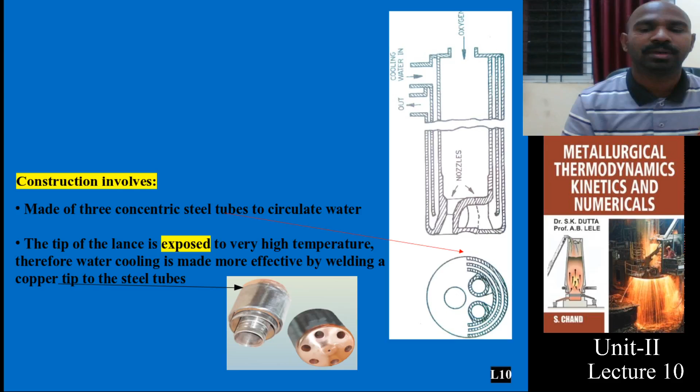Today I am going to speak about the construction of oxygen lances. The main thing involved is that this particular oxygen lance is made up of three concentric steel tubes with continuous circulation of water.

One more thing to notice is that the tip of this steel tube is made up of copper, which is surrounded by steel, constructed by welding.

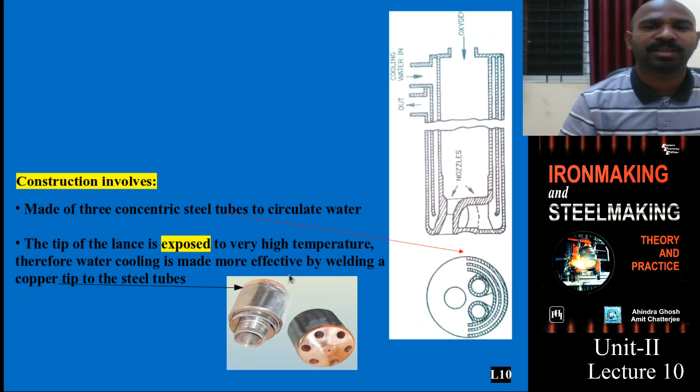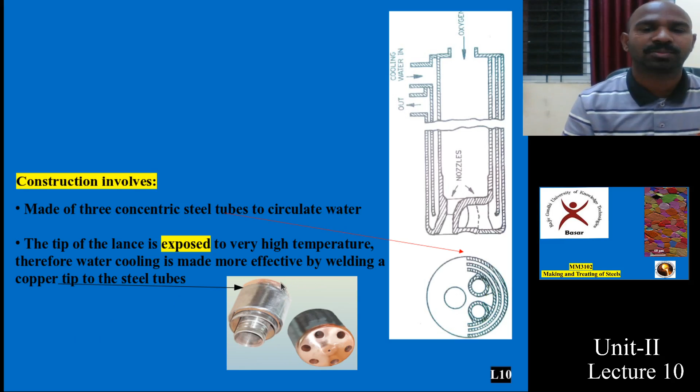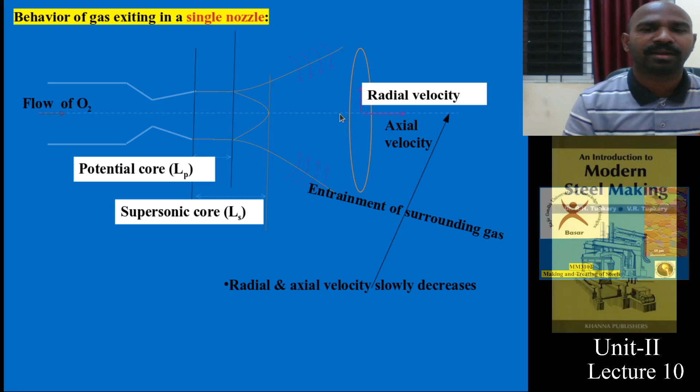One needs to notice that if this particular nozzle is a single nozzle, assume the flow of oxygen is coming from this direction, this is a typical nozzle design. This is the axis of oxygen coming from the top of the LD converter, so I can call the surrounding component the radial velocity, whereas along the axis it is called the axial velocity.

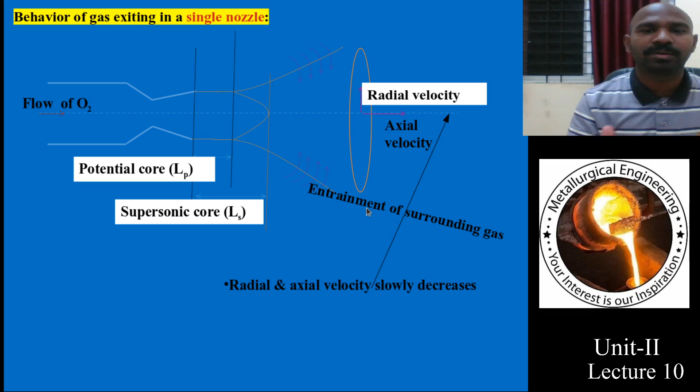This particular oxygen gas may entrain or interact with surrounding gas. To repeat, this incoming oxygen flow, along the axis, is called the axial velocity.

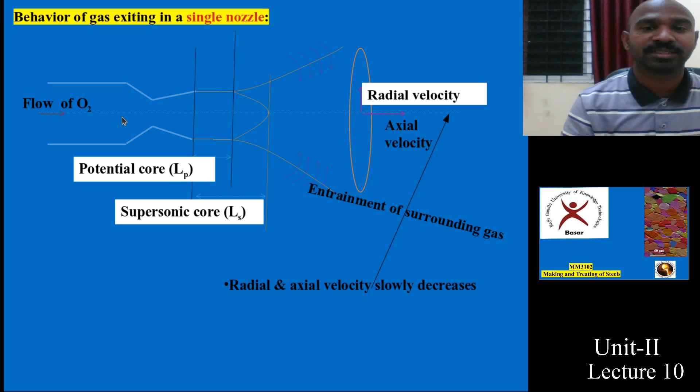There is one more assumption. If you consider realistic situations, it also interacts with the surrounding molten steel, and there are a few terminologies used in this oxygen lance and molten metal interaction.

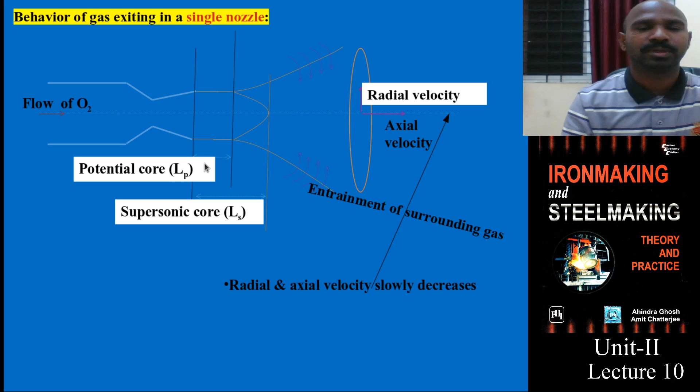From this tip to the surface of the molten steel, it is divided into parts. The first part is called the potential core, and from there to the next stage is called the supersonic core, with supersonic velocity and potential velocity.

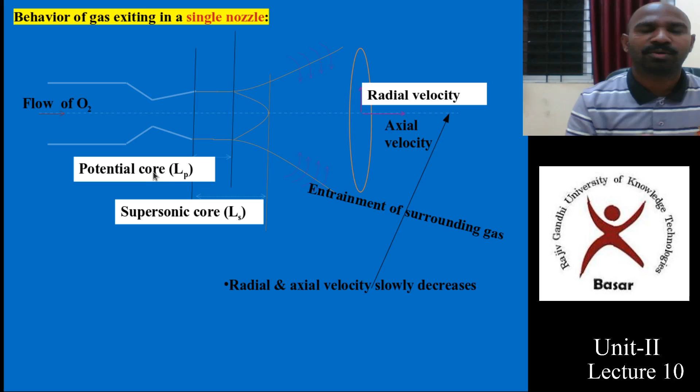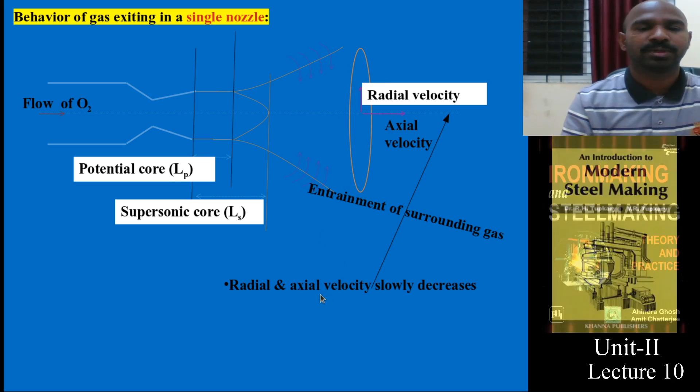Based on that, these distances are categorized into radial and axial velocities, and there is a dependency: radial velocity keeps decreasing, and axial velocity also decreases as the distance proceeds.

Coming to the spread of this oxygen jet, how do we understand what the spread will be inside the molten metal, even while maintaining distance from the surface of the molten steel? There are simple formulas to analyze this and get an idea.

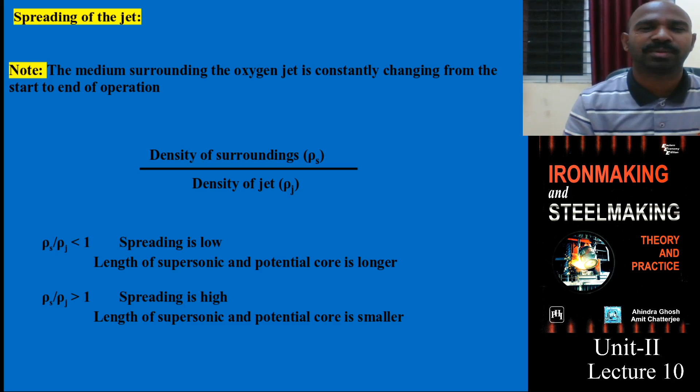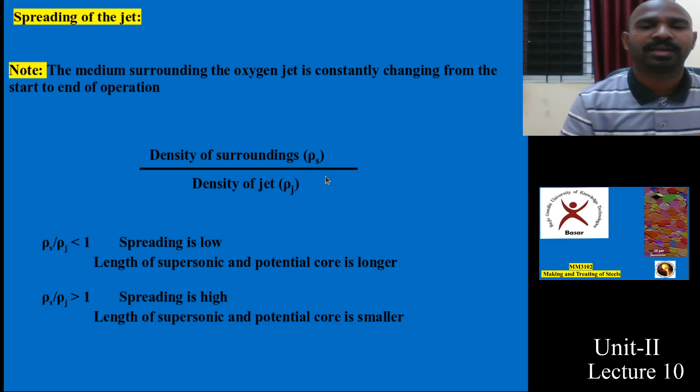The medium surrounding the oxygen jet, in this case molten steel, constantly changes from the starting point to the ending point as time proceeds because of the surrounding interaction. So it is decided that the spread of the jet can be estimated by the density of the surroundings, the molten steel, and the density of the jet, the gas jet.

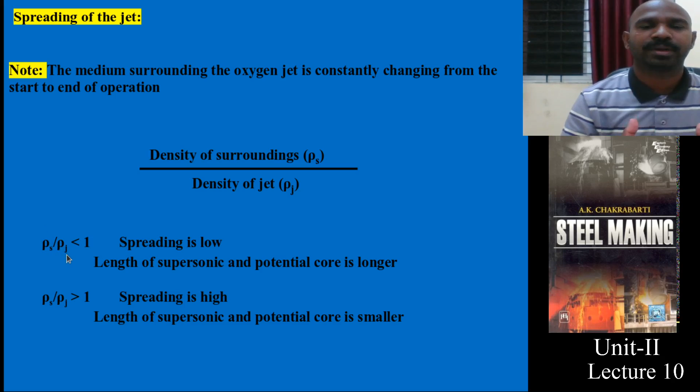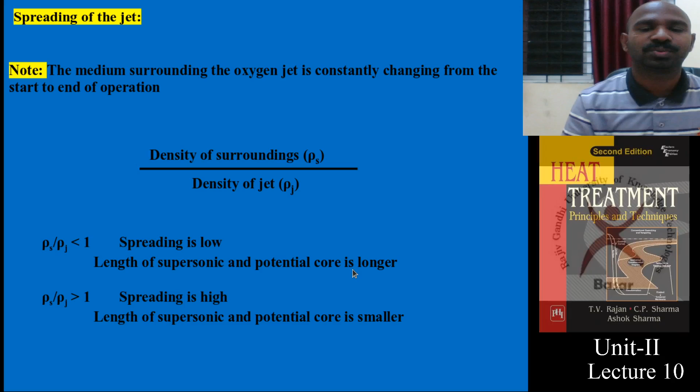If the ratio of surrounding density, molten steel density, to jet density is less than 1, it is assessed that the spread is low, meaning the length of the supersonic and potential core is longer. If it is greater than 1, spreading is high, and the length of the supersonic and potential core will be smaller, compressed.

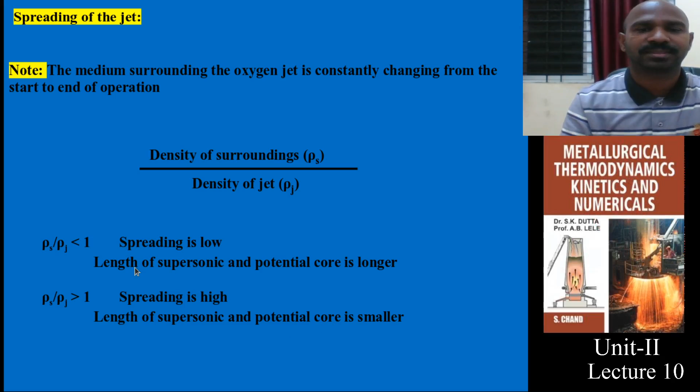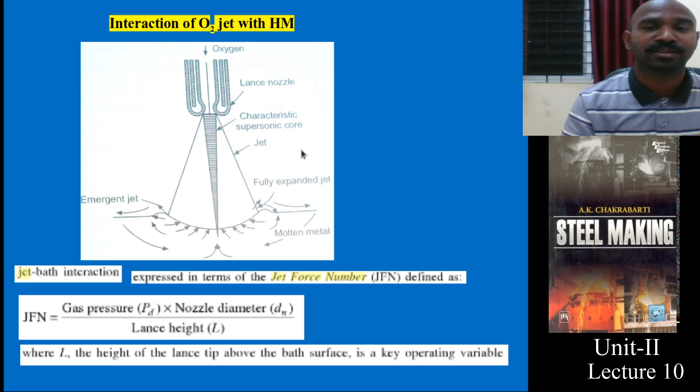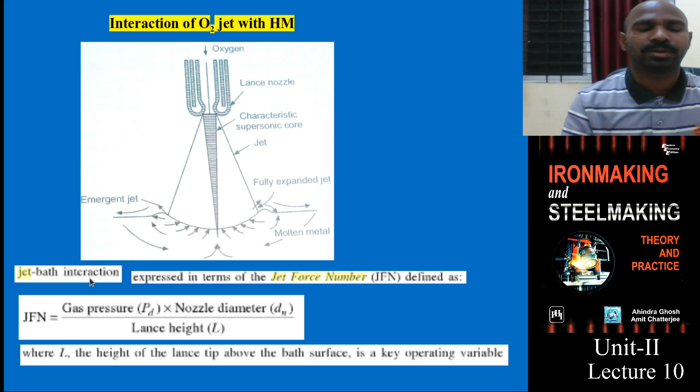Here I am going to tell you about the interaction of the oxygen jet with hot metal. How does it interact? How do you assess and calculate the incoming oxygen from the oxygen lance tip to the surface of the molten steel? It can be characterized by a parameter called jet bath interaction.

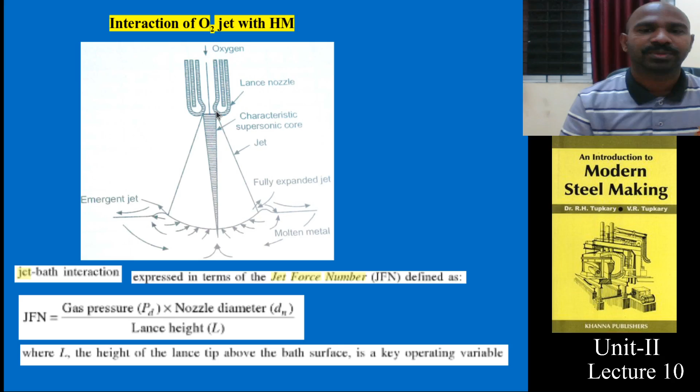This is expressed in terms of the jet force number, which is a ratio of gas pressure and nozzle diameter, the oxygen lance diameter, and the lance height from the molten steel to the oxygen lance tip. Remember these formulas, there will be numerical problems in the final exams and the gate examinations.

The jet velocity can also be calculated by another parameter such as Mach number: the ratio of velocity of the incoming oxygen gas to the velocity of sound it creates inside the molten steel.

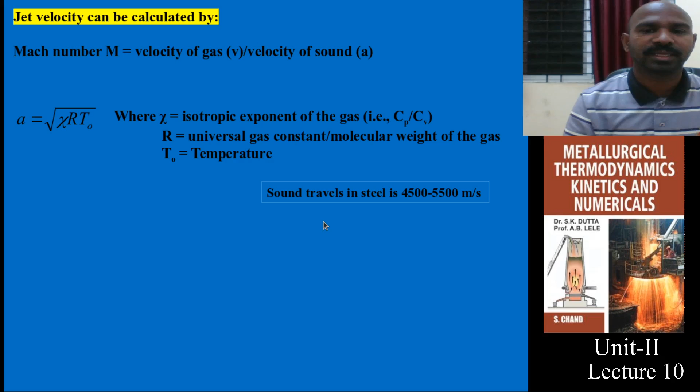So how do you calculate the velocity of sound? For example, the sound velocity in steel is a standard value around 4500 to 5500 meters per second. But within the molten steel, in this particular situation, how do you calculate it? It depends upon chi, the universal gas constant, and the temperature at that particular location.

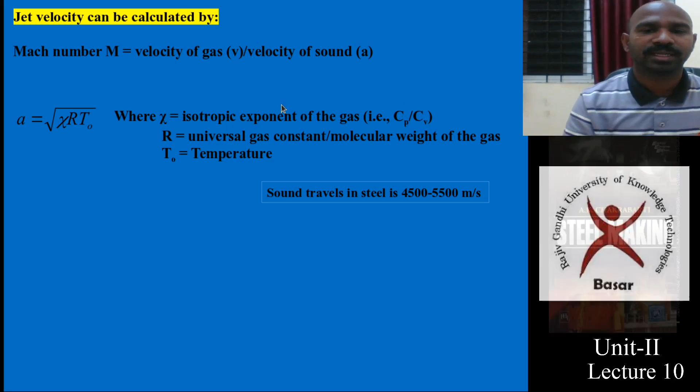Chi is calculated as the ratio of constant pressure and constant volume, which is the isotropic exponent with respect to those gases, and the universal gas constant is a standard value, with temperature taken in Kelvin. You can calculate it this way, but there is another dependency.

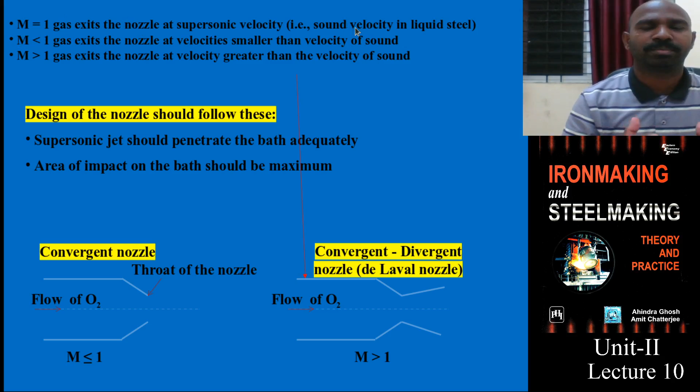You can characterize this Mach number. If it is equal to 1, you can say it is equal to the sound velocity of the liquid steel.

If it is less than 1, as oxygen exits the nozzle and interacts with the molten bath, the velocity of the nozzle is smaller than the standard velocity of sound in the steel.

If the Mach number is greater than 1, the velocity of the oxygen jet is greater than the velocity of sound, and the design of the nozzles depends upon this parameter.

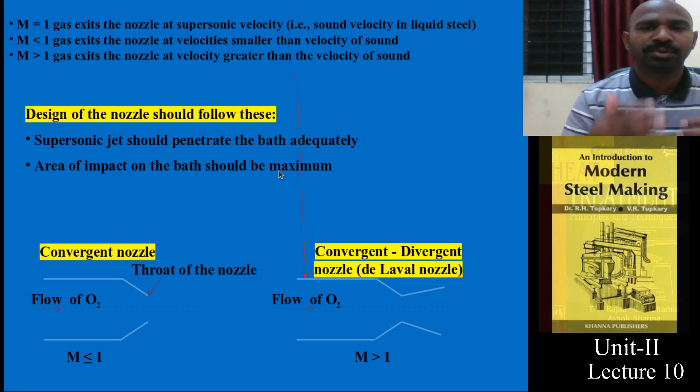The supersonic jet should penetrate the bath optimally. It should not be very high speed, and it should not hit the wall of the molten metal converter. The area of impact should be maximum in both radial and axial directions, so that you get optimum stirring and homogenization of the steel quality.

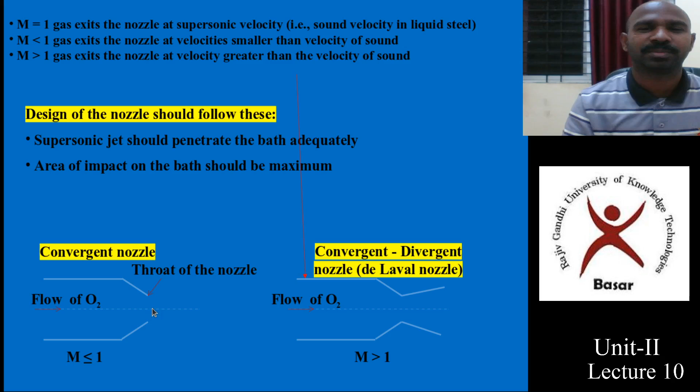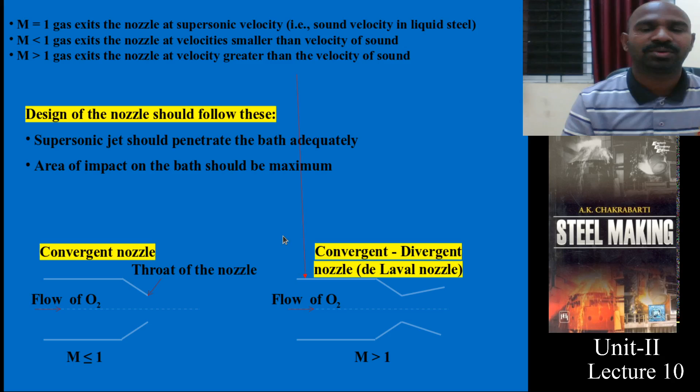There are two types of nozzles in practice in industries: the convergent nozzle, and the convergent-divergent nozzle. In the convergent nozzle case, the Mach number is approximately less than or equal to 1, while in convergent-divergent it is greater than 1. So depending on the requirement, if the steel quality is more heterogeneous before refining and converting iron into steel, you use convergent-divergent type nozzles.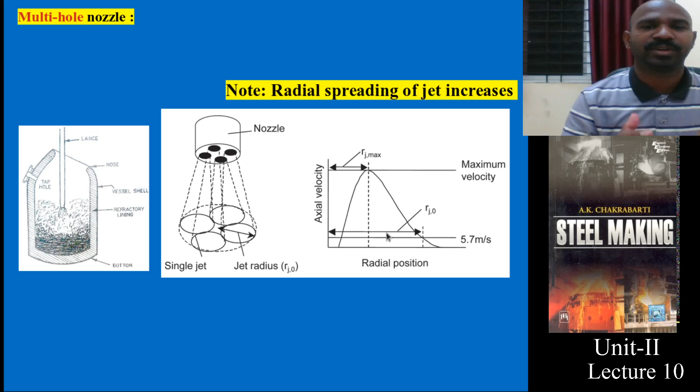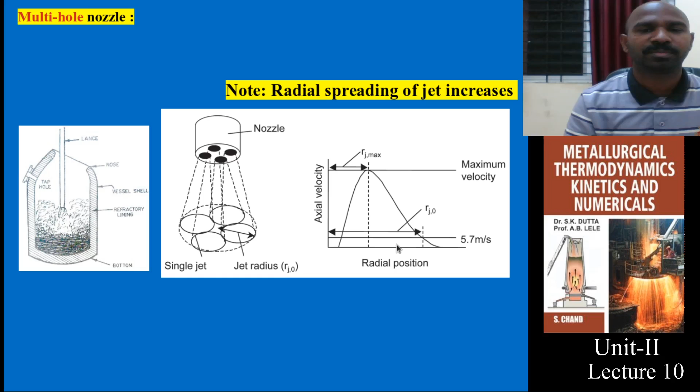With multiple nozzles instead of a single nozzle, how do you characterize the spreading of the oxygen jet inside the molten steel? The axial velocity is maximum at one particular jet radius along the axial direction. Along the radial direction, for example at 5.7 meters per second, the radial position increases and becomes longer, and after the maximum velocity is achieved, it slowly decreases.

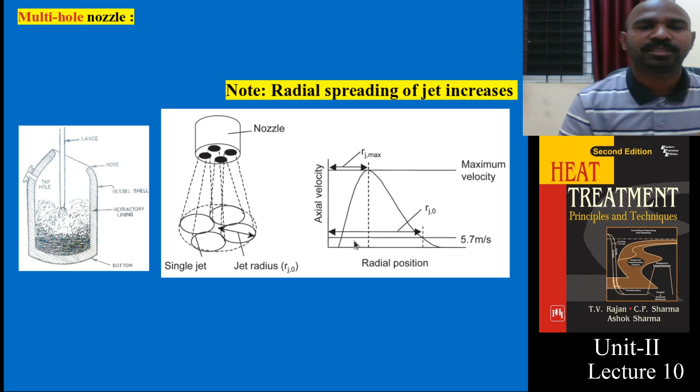This is the practical view of the oxygen lance and LD converter shown as reference on the left side. The area of impact of the oxygen jet on the molten steel bath can be increased by changing from a single nozzle to multiple nozzles.

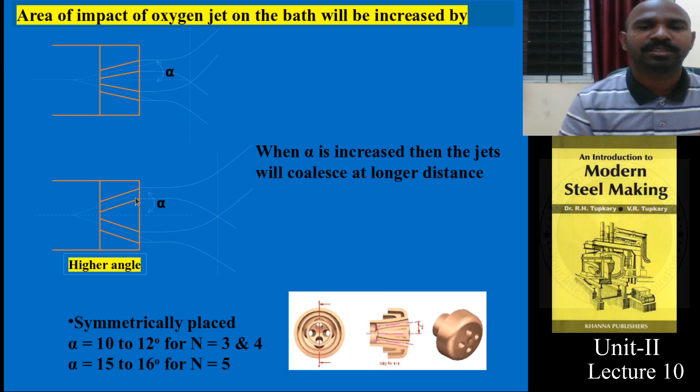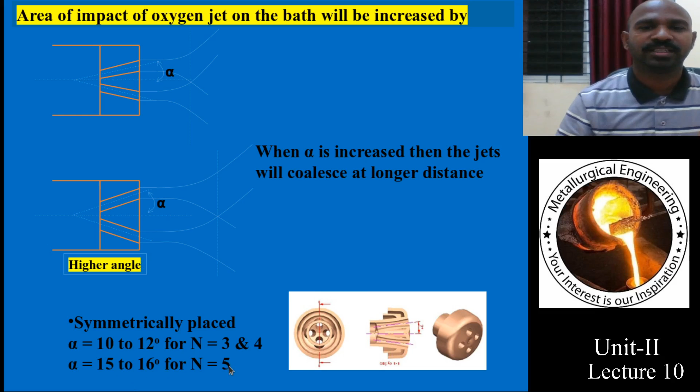This occurs based on the angle from the axis to the nozzle axis line and the nozzle velocity. For example, if the angle is lower, the jet coalescence, or interaction of the jet with the molten metal surface, occurs at a certain distance. If the angle is increased higher, such as 15 to 16 degrees with 5 nozzles, it coalesces at a larger distance. These schematics illustrate this.

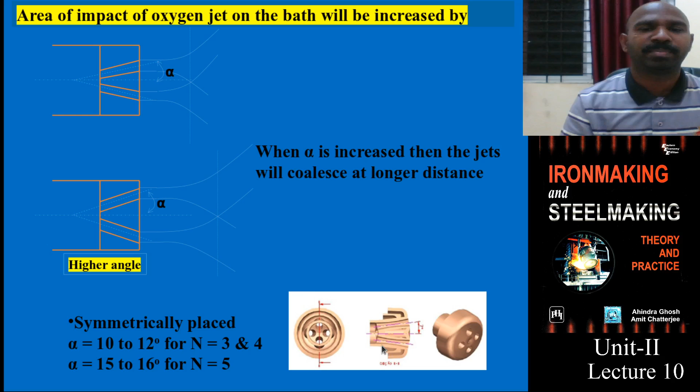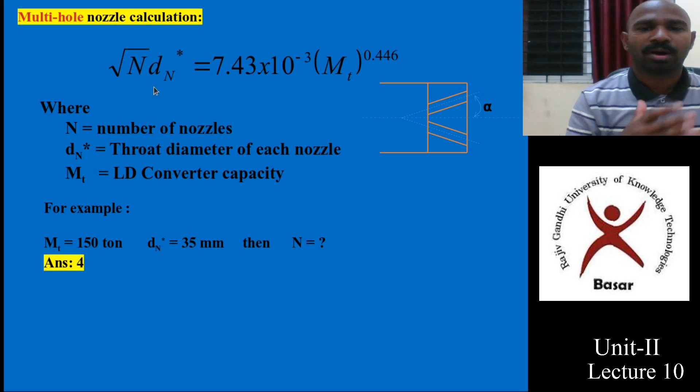Now these are practical schematics of multiple oxygen lance jets, in the case of multiple hole nozzles. So how do you calculate the number of nozzles? If I give you the LD converter steel capacity and the diameter of a single nozzle, how do you calculate the number of nozzles? Using this simple formula with molten metal capacity in tons and nozzle diameter.

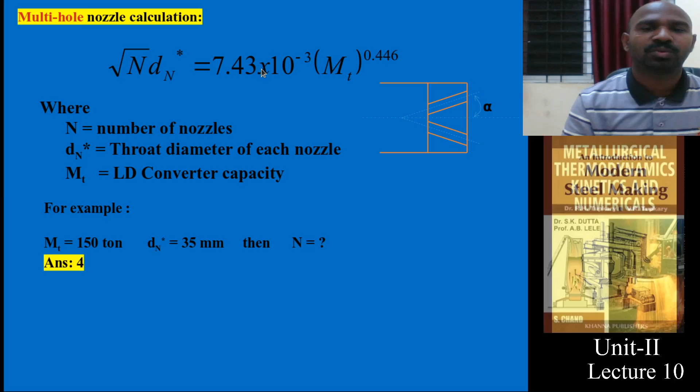So the only unknown parameter is n. This is multiplied by 7.43 into 10 to the power of minus 3, and you can calculate it. For example, in this situation, if you substitute all these values, n comes out to 4. This suggests there are 4 nozzles.

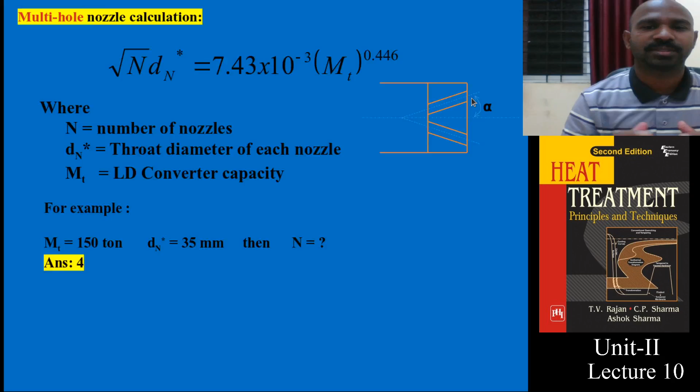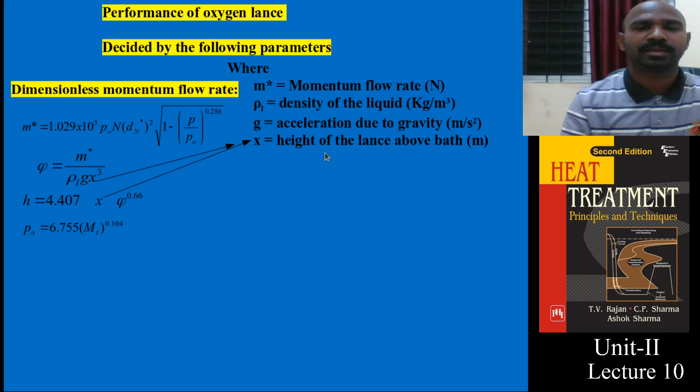How do you calculate the performance of the oxygen lance? It can be decided by the following parameters. Try to understand: M star is the momentum flow rate of the oxygen jet in the bath, rho L is the density of liquid steel, g is acceleration due to gravity, and X is the height of the lance above the molten metal bath surface. N is the number of nozzles, Dn star is the diameter of the nozzle, and P naught is the applied pressure in bar. All units are mentioned here, P is atmospheric pressure, and P naught is the applied pressure.

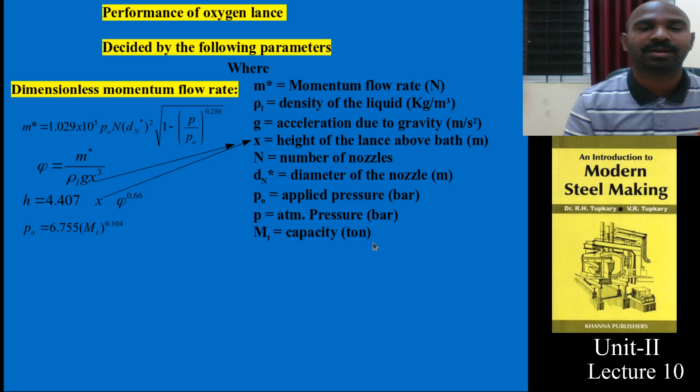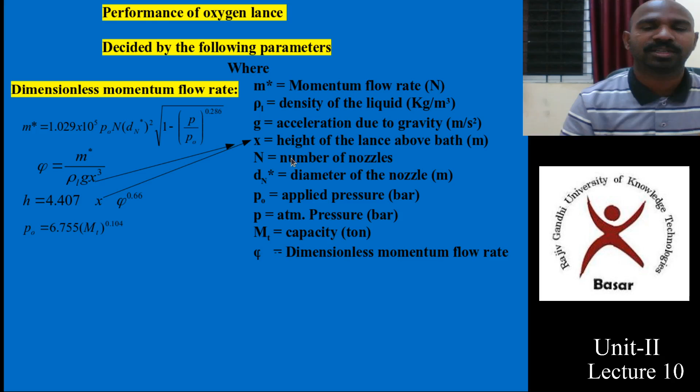MT is the capacity of molten steel in tons that can be produced. Phi is the dimensionless momentum flow rate, calculated from M star, rho L, acceleration due to gravity g, and X, the height of the lance above the bath. This gives you the dimensionless value.

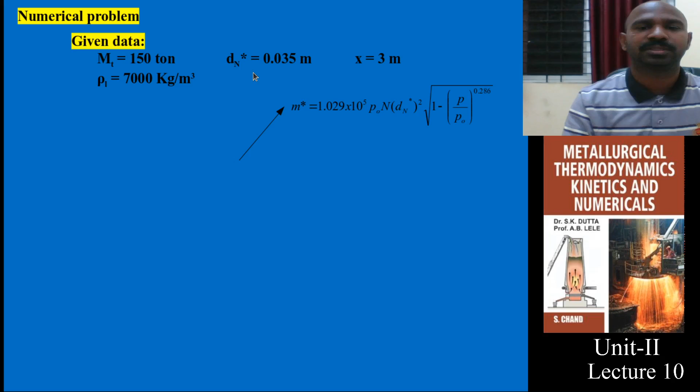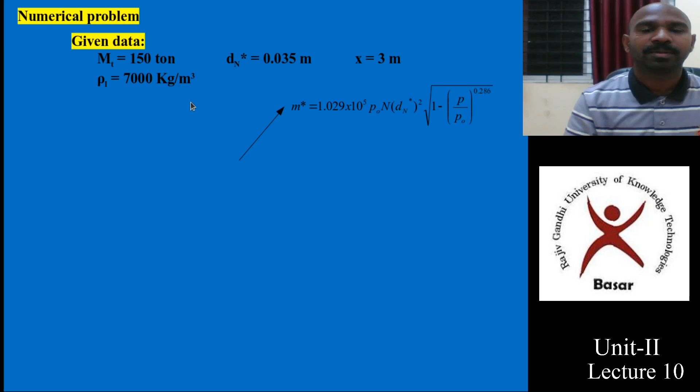Let's take an example with these formulas. If I give you the molten metal capacity produced by the LD converter, the nozzle diameter used for this process is 0.035 meter, the lance height above the molten metal surface is 3 meters, and the density of molten steel is 7000 kg per meter cube, calculate the following parameters: how many nozzles are there?

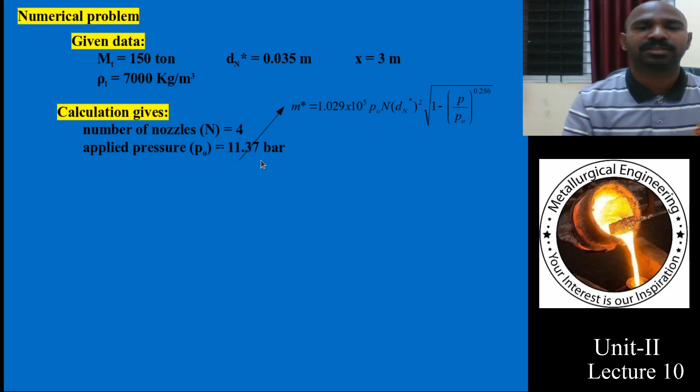As in the previous problem, you can calculate this. What is the applied pressure? Based on the atmospheric pressure, you can calculate it using the formulas from the previous slide. The momentum flow rate and dimensionless flow rate can also be calculated.

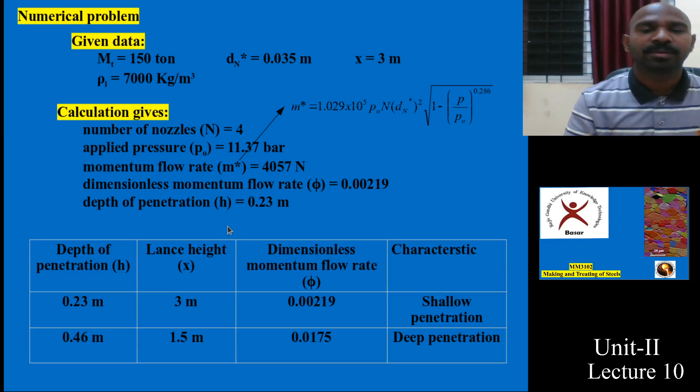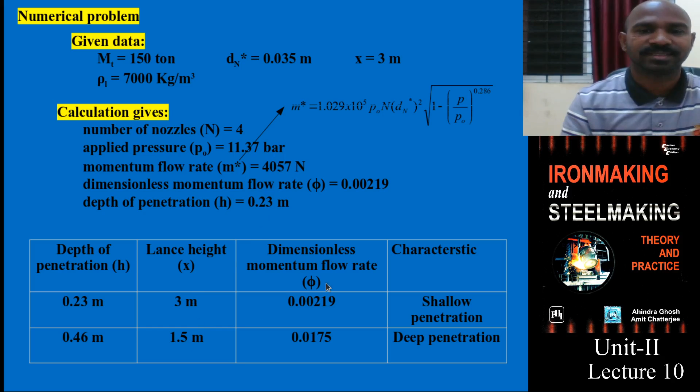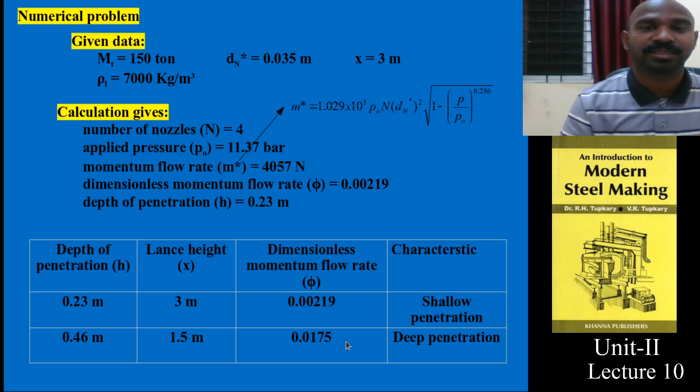The depth of penetration inside the molten bath, H, can be calculated. For example, if the depth of penetration H is 0.23 meter, and the lance height X is 3 meters, and the dimensionless momentum flow rate value is 0.00219, then the characteristic behavior of the oxygen jet is assumed to be shallow penetration; otherwise it is called deep penetration. So please try to notice all these parameters and characterize the oxygen jet values accordingly.